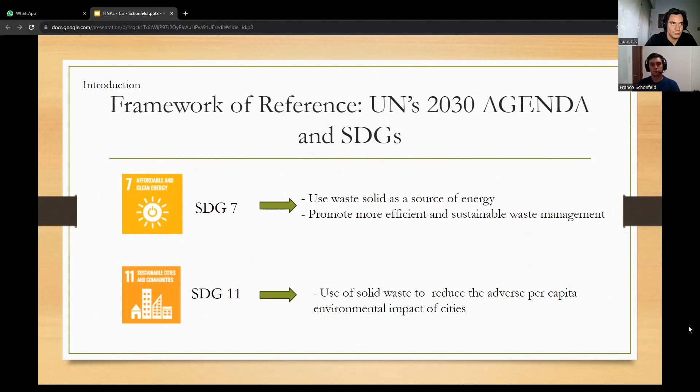The objective of this paper is to address the problem of energy scarcity and how to take advantage of solid urban waste.

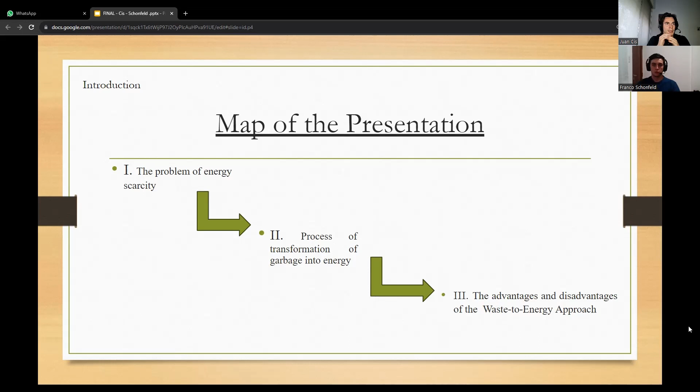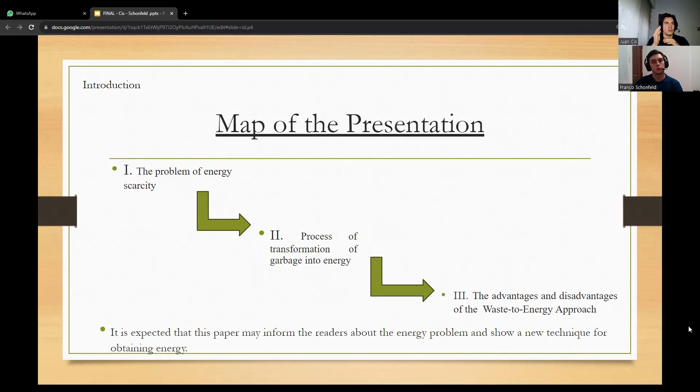Now we will explain how to solve this problem using the waste-to-energy method. First, the impact generated by solid waste worldwide will be developed. Secondly, the discussion will move to the process of transforming waste into energy, developing step by step the different instances from the collection of waste to obtaining energy. Thirdly, the advantages and disadvantages of the application of this procedure will be presented. It is expected that this paper may inform about the energy problem and show a new technique for obtaining energy that gives a useful purpose to the burning of waste, so as to have a new form of energy.

Now we're going to attack the problem. In recent years, the volume of municipal solid waste has increased due to urbanization and improvement in people's living standards. The solid waste can be of residential, urban, commercial, industrial, or institutional origin and has long-term repercussions on human health and the environment.

Open dump sites are locations where solid waste is indiscriminately deposited without operational control or environmental protection measures. These dump sites lack minimum safety measures and may contain hazardous and pathogenic waste. The dump sites generate problems like soil and water contamination, and the lack of soil impermeability at open dump sites allows for the generation of substances that can contaminate groundwater.

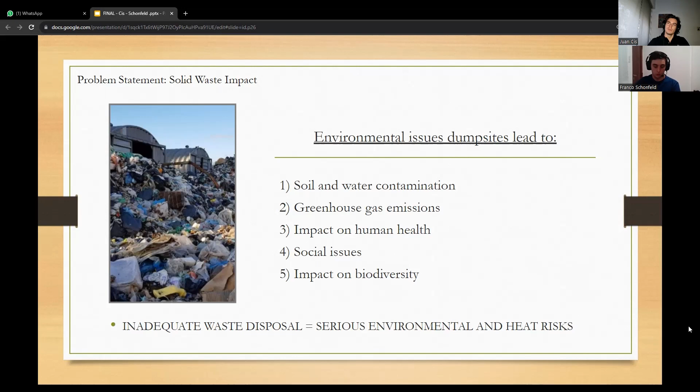Greenhouse gas emissions: waste decomposition at open dump sites produces biogas that contributes to climate change. Impact on human health: open dump sites attract pests and disease vectors. Social issues: many open dump sites become a source of employment for informal waste pickers who work without personal protection or safe conditions. Impact on biodiversity: soil contamination can negatively affect the surrounding flora and fauna. In summary, open dump sites represent a serious environmental and public health problem due to the lack of adequate measures for solid waste disposal.

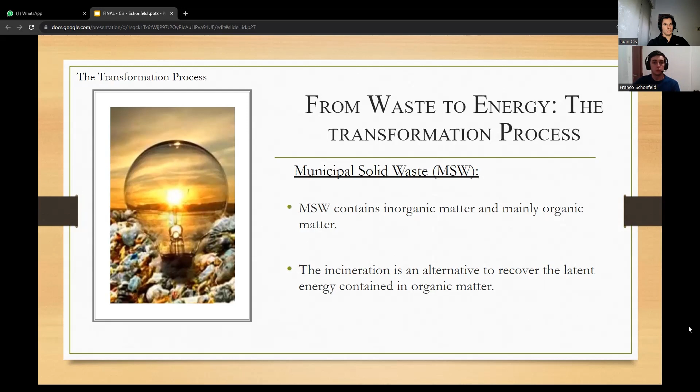Municipal solid waste (MSW) contains organic as well as inorganic matter, and the organic matter portion is larger compared to inorganic matter. The latent energy present in its organic fraction is recovered for utilization through the incineration of MSW. This process will be explained below.

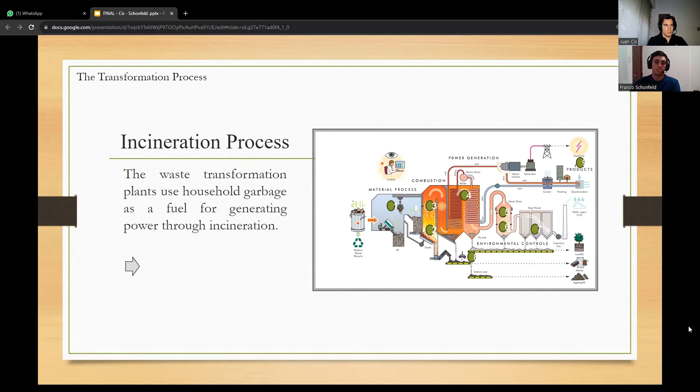The waste transformation plants use household waste as fuel for generating power through incineration, much like other power stations use coal, oil, or natural gas. The waste transformation process has several steps. The first step is the material process: trucks collect waste and this material is received at the plant. Then the waste is mixed and prepared for combustion.

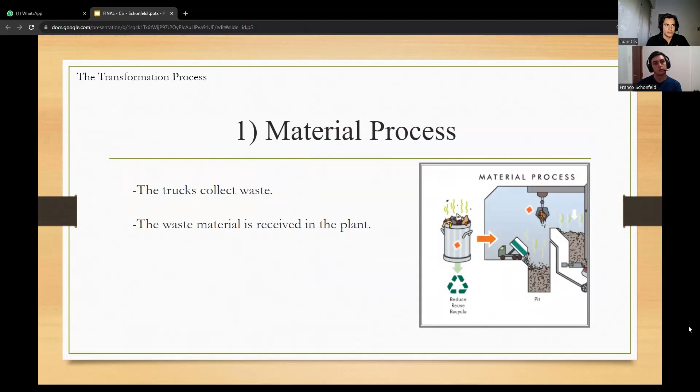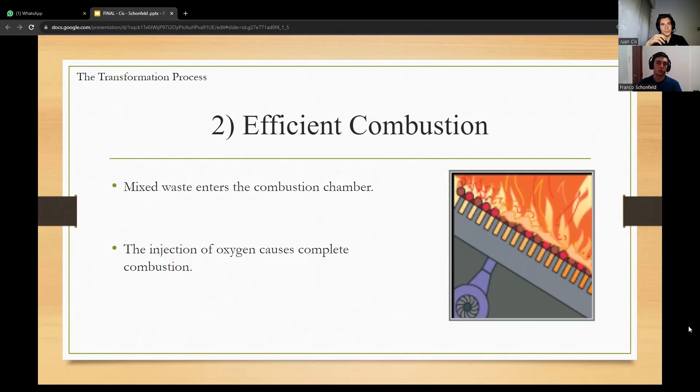The second step is efficient combustion. The mixed waste enters the combustion chamber where oxygen injection causes complete combustion. In the third step, nitrogen oxides are neutralized by injecting ammonia or urea; this process is 99% effective.

The fourth step is steam power generation. The steam generated by the boiler is used to move the turbines and generate energy. The cooling steam is transformed into water to be used again in the process, or diverted as a heat source for users.

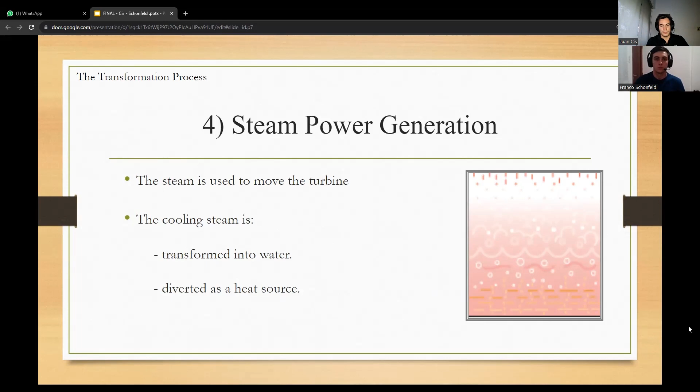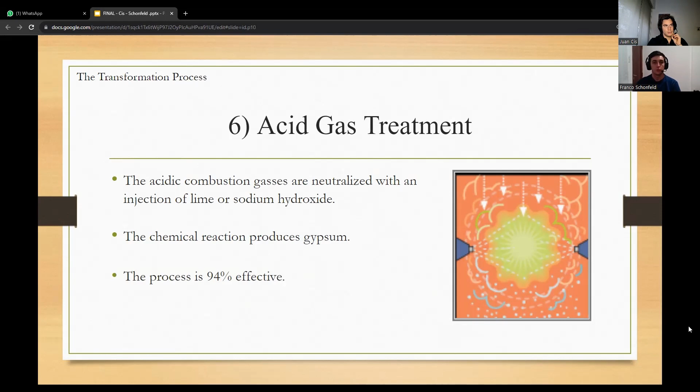In the fifth step, activated carbon is injected to remove heavy metals such as mercury and cadmium. In the sixth step, the acid gases from combustion are neutralized with an injection of lime or sodium hydroxide, and the chemical reaction produces gypsum, which is easier to remove. This process is 94% effective.

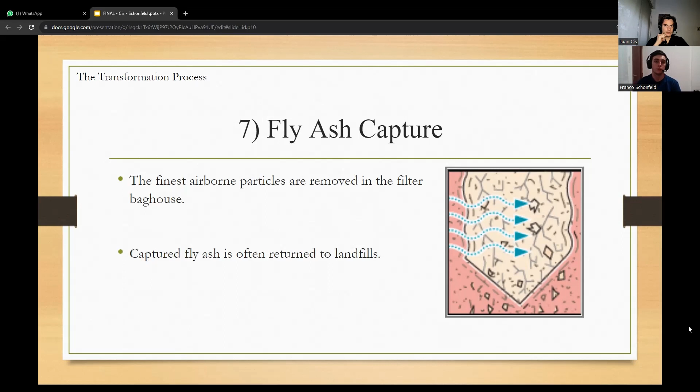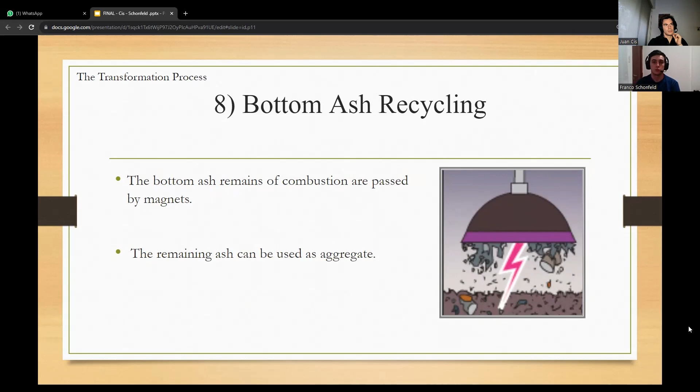In the seventh step, the finest particles from the air are removed in the filter baghouse. Captured fly ash is often returned to landfills. In the eighth step, the bottom ashes left from combustion are passed through magnets to collect metals that were not burned. The remaining ash can be used as fine aggregate for construction.

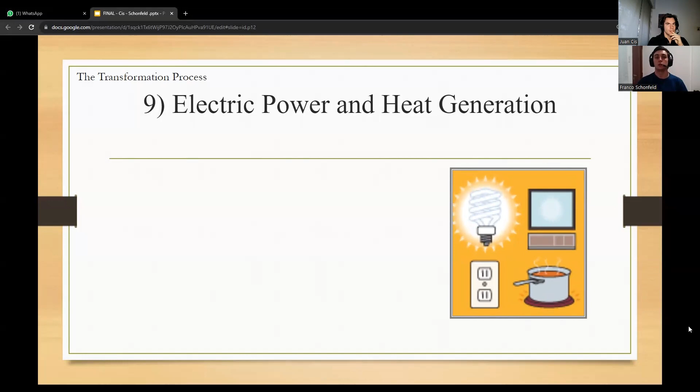As a conclusion of the process, we will obtain thermal energy and electrical energy, as we explained in the previous steps. One WTE plant produces enough electricity for 15,000 homes. Approximately 1 ton of waste is needed to supply a house for a month.

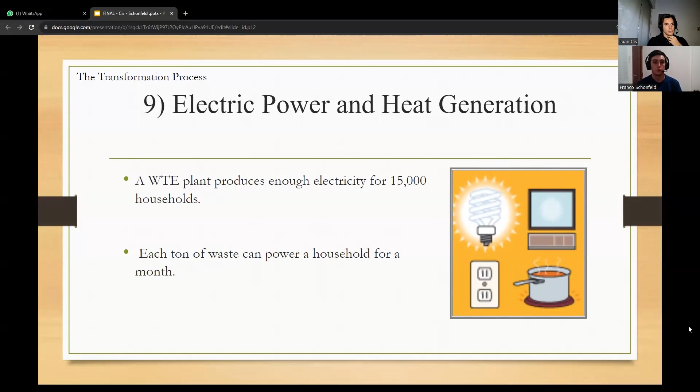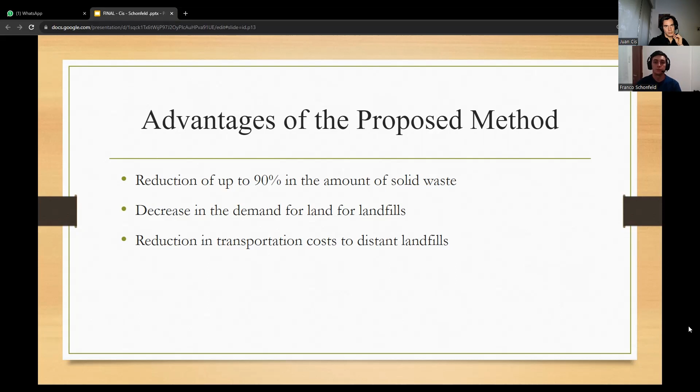Now I'm going to show the advantages and disadvantages of this method. Energy recovery from solid waste offers the following benefits: the amount of waste is reduced by 90%, the area destined for landfill is reduced, and there is a reduction in transportation costs because incineration plants can be located near the landfills. Another benefit is a reduction in environmental pollution. We can generate electrical energy and heat energy that can be used in industries, homes, and businesses.

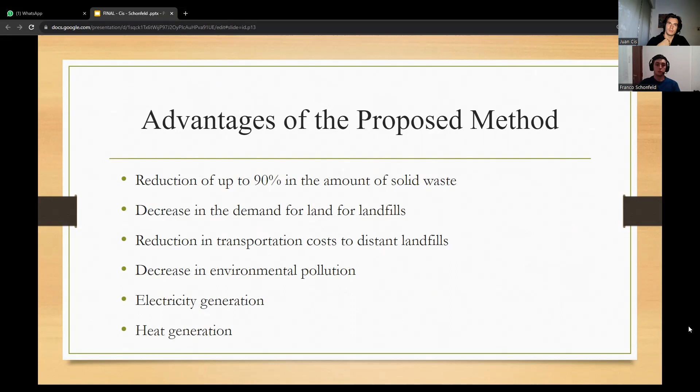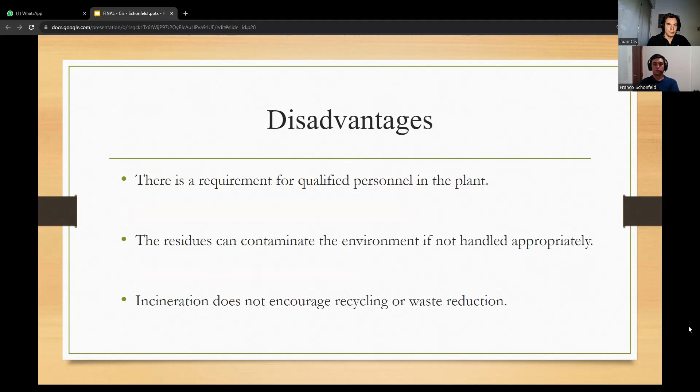In conclusion, addressing the global energy problem while tackling solid waste issues is a multifaceted challenge. The transformation of municipal solid waste into energy holds promise for sustainable development, waste reduction, and reduced environmental impact. However, this method requires effort to reduce waste generation and promote recycling.